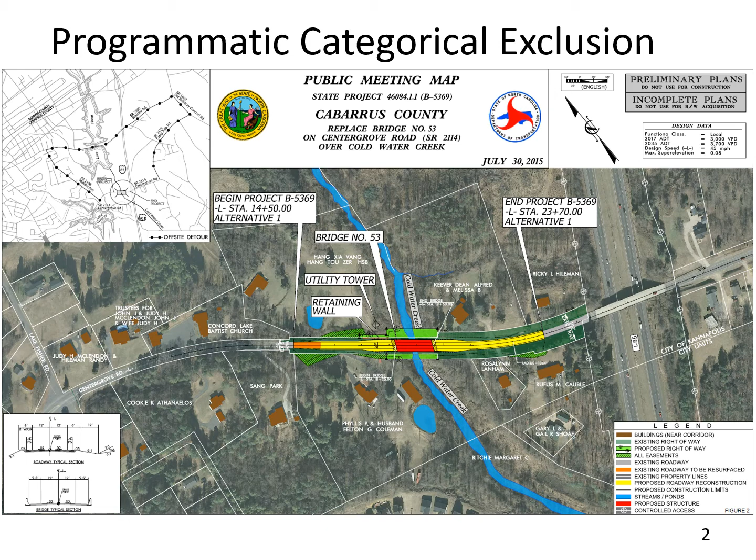So this is looking at a programmatic categorical exclusion, so it fits in that category of categorical exclusions. This is a bridge replacement project. So we can see here, this overview is giving us some idea of what's going on. Some retaining walls are being added. There's a proposed structure in here. It shows its relation to natural and human environmental components. We see residential structures, we see a creek, we see other bodies of water in this location as well.

There's public meetings for this, and the project was described to the public, what's going on, what's going to happen with the detour and construction, and allowing the people to come in and learn about the project and maybe express concerns to the Department of Transportation.

And looking at the overall cost of this, the total project cost was $2.3 million. The current traffic volume was 2,800 vehicles per day, and then the design year was 3,700 vehicles per day, with 1% twin trailer trucks and 4% dual. So this is an example of kind of the documentation that's involved in a categorical exclusion.

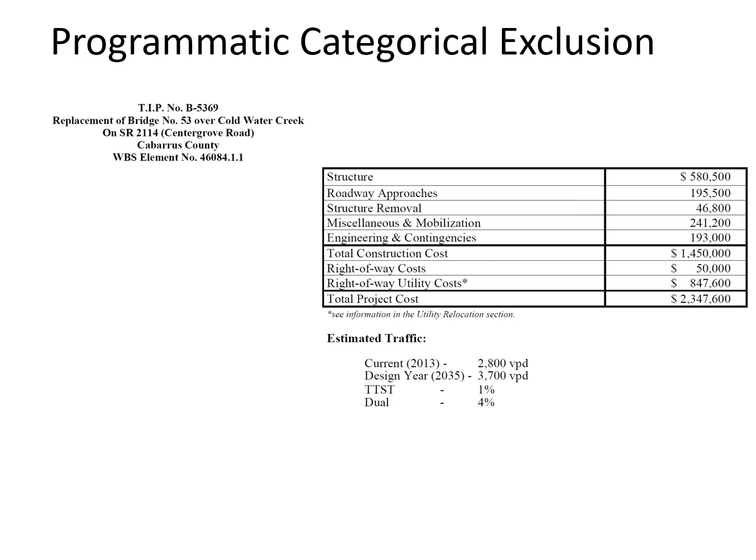Here's the form information that's included in this categorical exclusion. So it's kind of a checklist of things that the agency would need to work through in this additional documentation, and anything that's in the unfavorable response category needs to be explained further. So if there are some impacts, what's going to be done to mitigate this through the categorical exclusion.

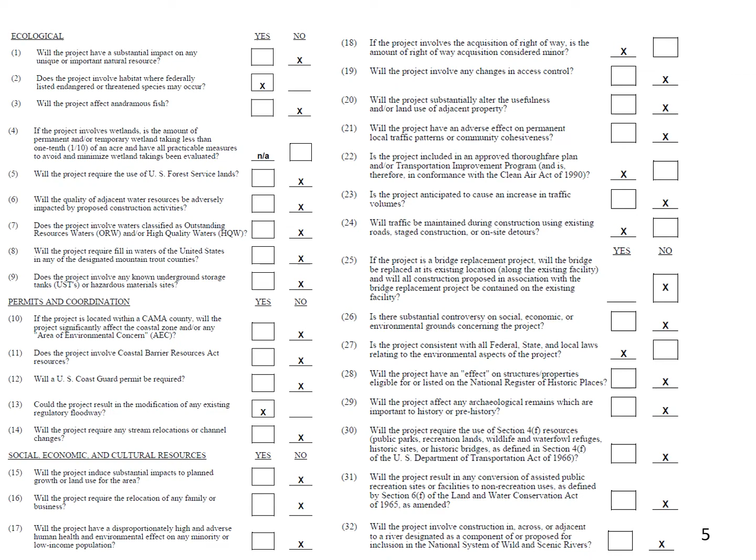Next, looking at an environmental assessment. So this is that middle ground where it's a larger project, but it may not fully require an environmental impact statement. And this document actually provided an anticipated NEPA schedule.

So what's going to be involved in local officials briefings and public involvement, when and how are the alternatives going to be developed and analyzed, the final public hearings and revised alternatives and Federal Highway Administration decision. When is that all going to take place or expected to take place? And this was between 2018 and 2020.

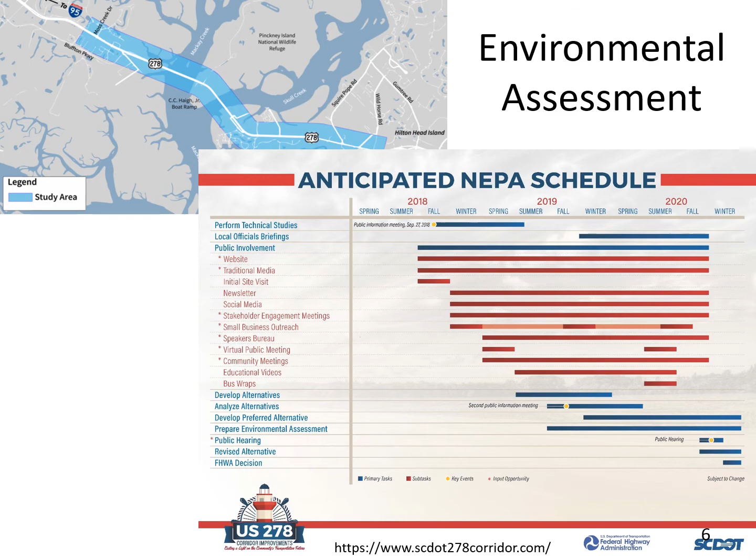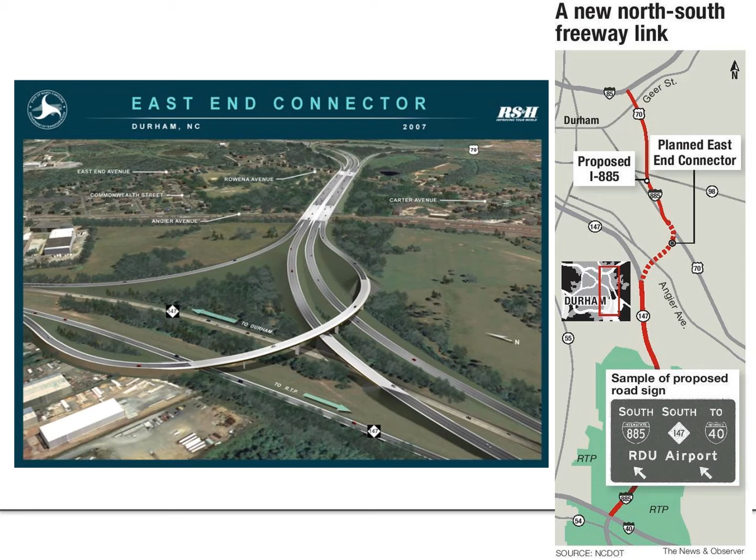So here's another example of a FONSI that resulted from an environmental assessment. This is a 126-page document. This is a new interchange in a short section of roadway that's connecting I-885 and ultimately I-40 in Durham, North Carolina, part of NC 147. So it's a few mile segment. This is an important connection in this area.

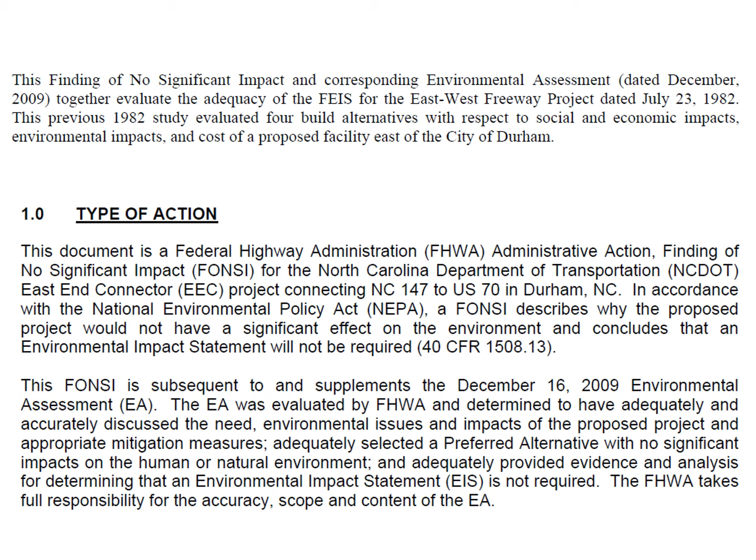And the key statement here is that the finding of no significant impact and corresponding environmental assessment together from this original 1982 study evaluated 4 build alternatives with respect to social and economic impacts, environmental impacts, and cost of this facility. And so a lot of details that'll be included in here. We'll look at a little bit more of some of this information.

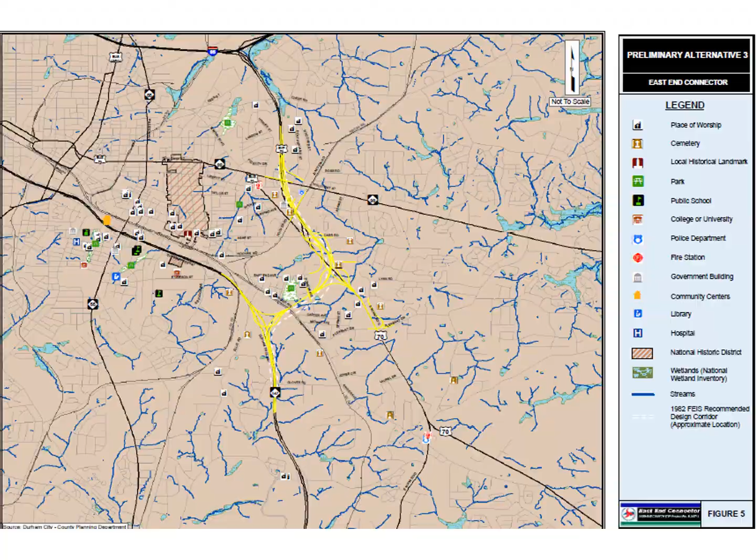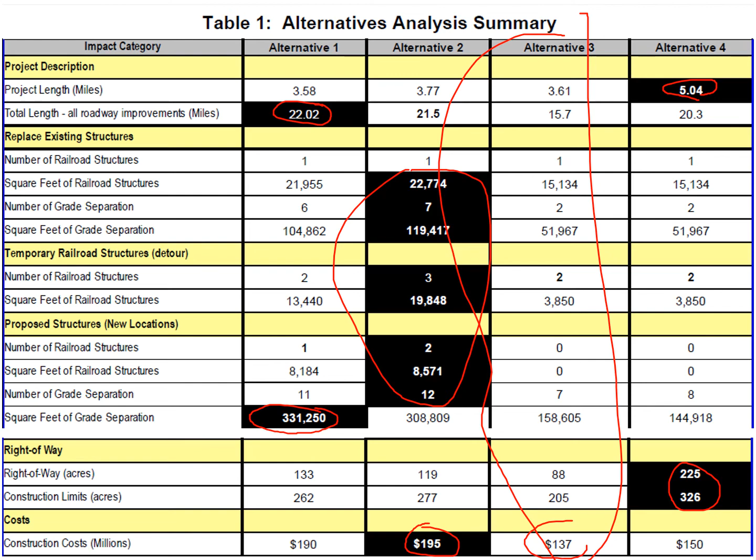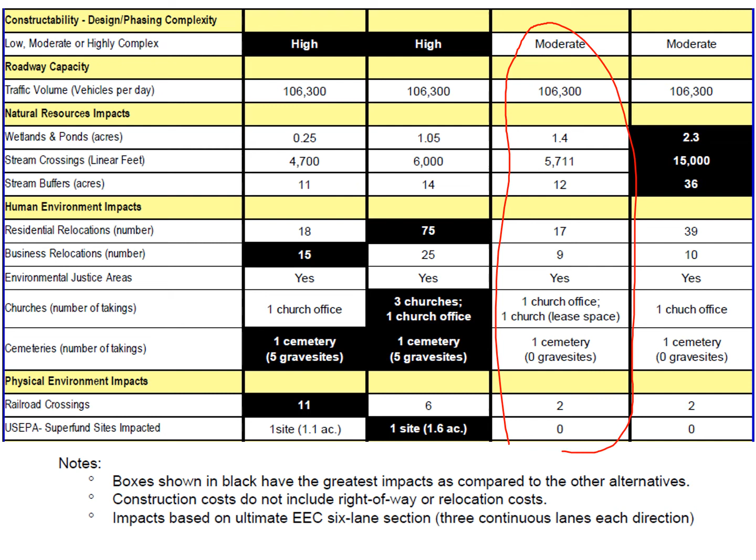The actual project length was the longest, though, for alternative 4, and right-of-way and construction limits was the highest there. And the recommended alternative 3 actually had the lowest cost at $137 million. And we can see that the table continues. Alternative 3 continues to perform well relative to the other locations.

Now here's an example of an environmental impact statement. So this is the biggest document that resulted in a record of decision. This is the Monroe Expressway that's outside of Charlotte, North Carolina. This is an almost 20-mile long new location roadway from US 74 at I-485 to US 74 near Wingate and Marshville in Union County.

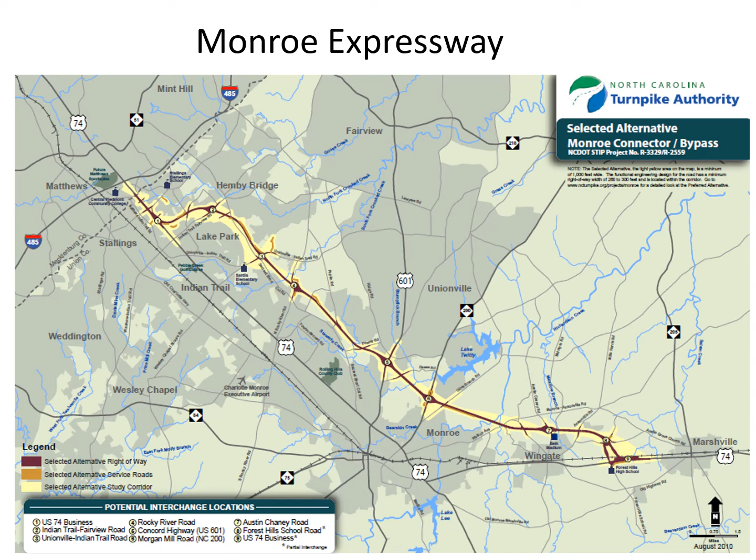And here are a lot of different alternatives. There were 4 major alternatives, A, B, C, and D, and then there were slight alternatives to each of those that were considered further. And so we can see as we moved up from categorical exclusion to environmental assessment and now an EIS, there's lots of additional detail.

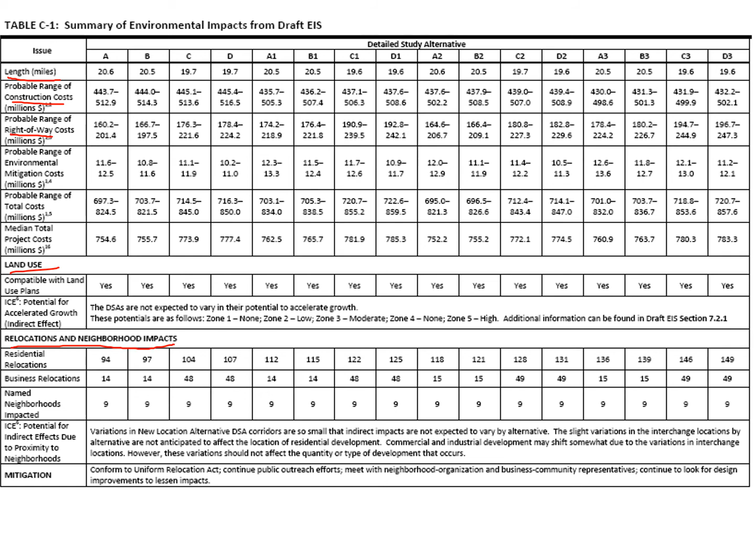So I'm going to click through a couple of these tables that look through each alternative, compare different values, and arrive at a recommended solution. So some of the things we're looking for here are the length, the construction cost, the right-of-way cost, land use considerations, relocations, and neighborhood impacts. So how many residential and business relocations?

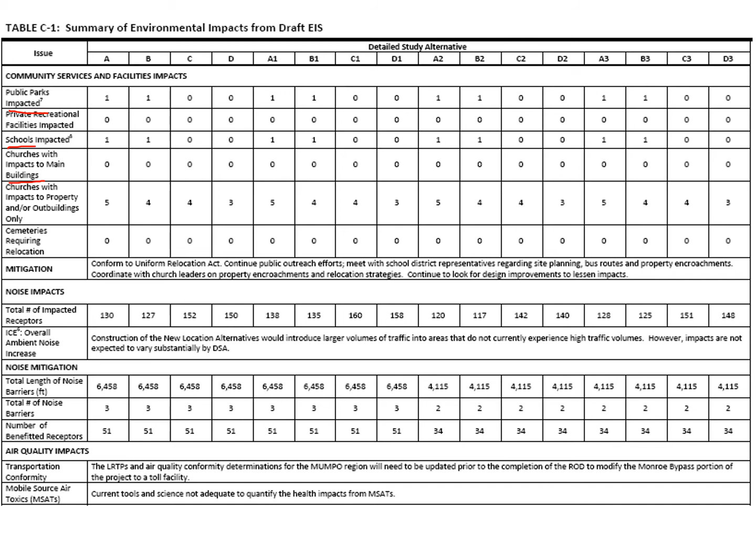Community services and facilities. So how many public parks impacted? What about schools and churches, cemeteries? We see this is a huge one for projects, and so all of these alternatives actually avoided impacting cemeteries. Those are very controversial and expensive to relocate.

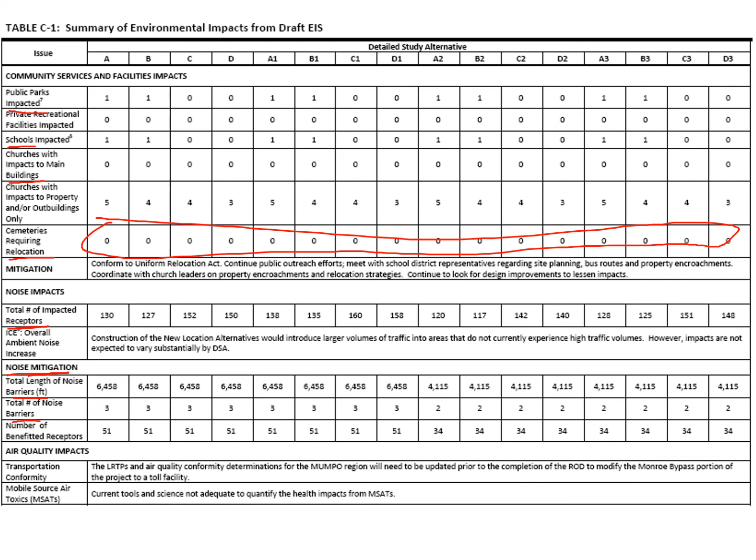Looking at noise impacts, so the number of receptors, so that's homes and businesses that could be impacted by the noise, what mitigation measures would be required, so the length of noise barriers and the number of barriers. Air quality impacts are included. We also look at farmland impacts, so how many farm relocations are required.

Utility impacts is a big cost, so looking at transmission line crossings, gas transmission pipelines, railroad crossings, all those are potential impacts. Mitigations are explained here as well. We'll also take a look at visual impacts, hazardous material impacts. Typically, when you're looking at hazardous materials along a roadway corridor, when a project's being done, these usually refer to abandoned, or it can even be also active gas stations and the tanks associated with those.

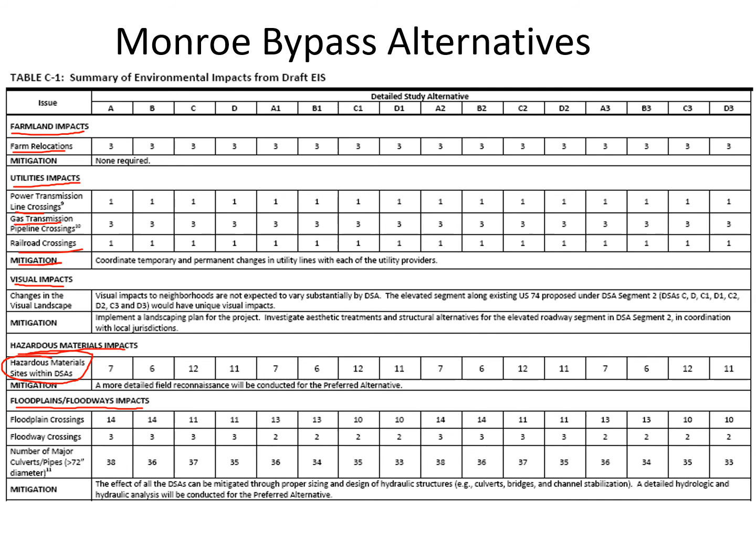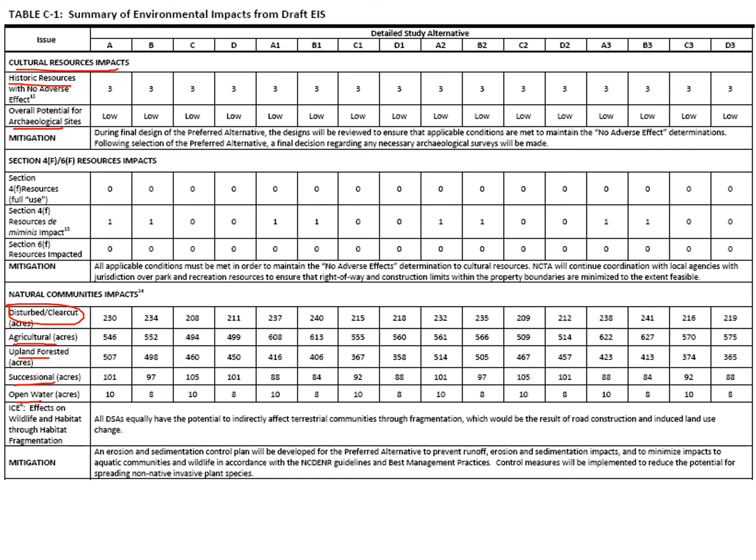We look at floodplains and floodway impacts. Cultural resources impacts, so looking at the historic resources, archaeological sites. Natural community impacts, so looking at the number of acres that are disturbed, agricultural land, successional forests and upland forest, open waters. All those things are quantified and classified within this document. Ponds and wetlands, perennial streams, total streams, linear feet of stream needing mitigation, and also a documentation of the protected species impacts.

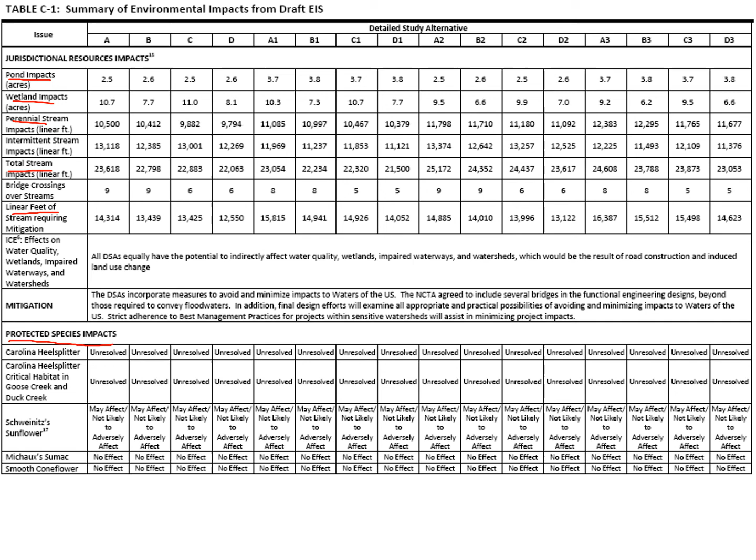And a lot of information goes into this. There's lots of footnotes that are included, lots of mitigation, and all of the alternatives have to have this information collected. So this can be a very long process from the time that a project is conceived to collecting all the necessary information, meeting with the public, gathering their input, and making decisions.

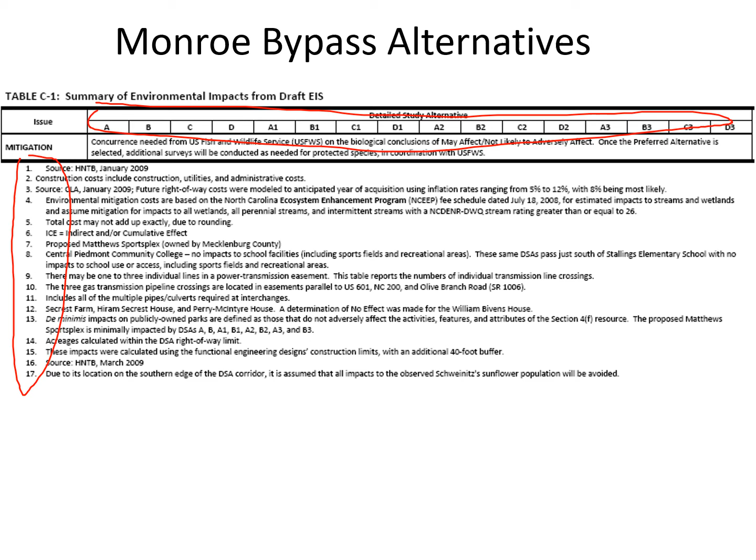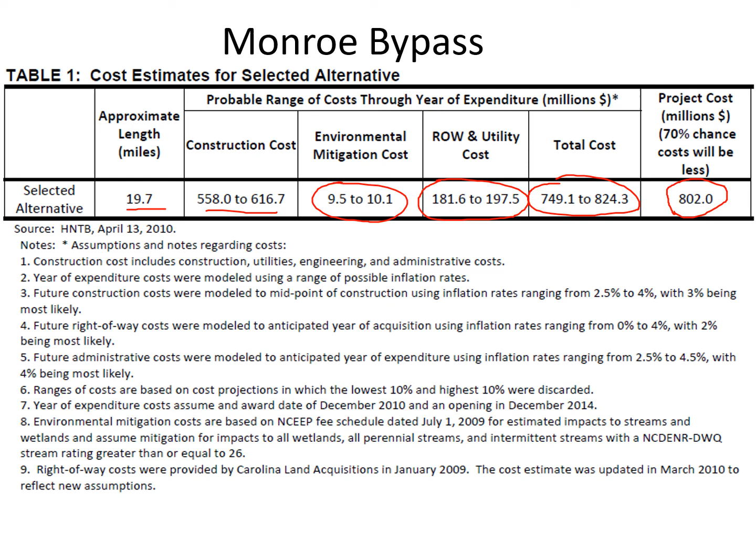So overall, the selected alternative had a length of 19.7 miles, a construction cost of $558 to $616 million. The mitigation for the environmental impacts was approximately $10 million, right-of-way cost between $180 and $200 million, for a total cost of between $750 and $825 million, with a 70% chance the cost is less than $802 million. So very expensive and impactful project here, and that's why this document is prepared.

So looking more specifically at the alternative that was selected, it was one of the shortest compared to the others. The shortest one was 19.6. It avoided the wetland impacts at Rocky River Roads. It was the only one of the 8 alternatives that did. It did have a higher cost than most, but lower impacts in several other areas. It was on the low end of residential relocations, but on the high end of the business relocations.

And in this documentation, there was actually discussion of this trade-off, being that more businesses would need to be relocated, but it was going to be a further distance from the elementary school. There were no direct school impacts, but there were 3 church property impacts, but not to the actual structures themselves. There were no sports property impacts. It was on the low end of the active agricultural lands, had the least number of hazardous sites.

It was in the middle of the upland forest impacts, on the low end of the acres of ponds impacted, in the middle of the number of wetlands, on the lowest end of the perennial streams impacted, somewhat on the middle to low end of the intermittent streams, and no disproportionate impact on minority or low-income populations.

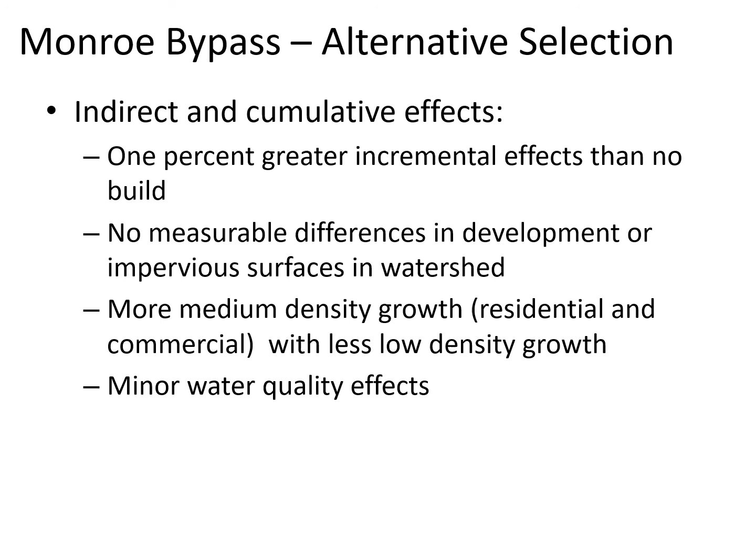There was some information about the indirect and cumulative effect, so 1% greater incremental effects than the no build, no measurable differences in development or impervious surfaces in the watershed. They expect more medium density growth with less low density growth and only minor water quality effects. And some of the measures they took to minimize the harm. So what are some of the mitigation effects?

So in terms of relocations, they tried to ensure that comparable replacement housing was available prior to the construction of the project. For community cohesion, there was a second neighborhood entrance that was added to one of the neighborhoods, and there were noise, visual, and access accommodations done in other locations. And noise barriers were included in the project to help with the impacts from noise that would be generated by the new roadway.